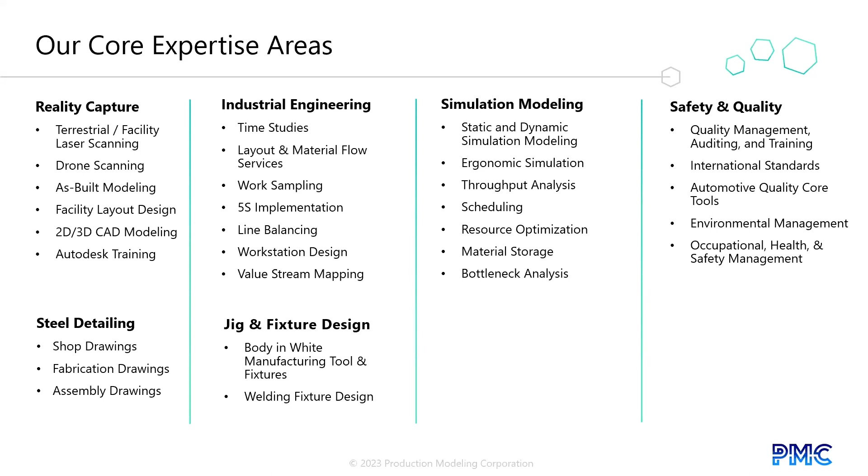Now I'd like to introduce Dave Stone to begin our presentation, Reality Capture and Simulation. Dave, take it away. Good morning everyone, my name is Dave Stone. I'm the Director of Simulation Services at Production Modeling Corporation. I'm a veteran of the auto industry, over 30 years in automotive.

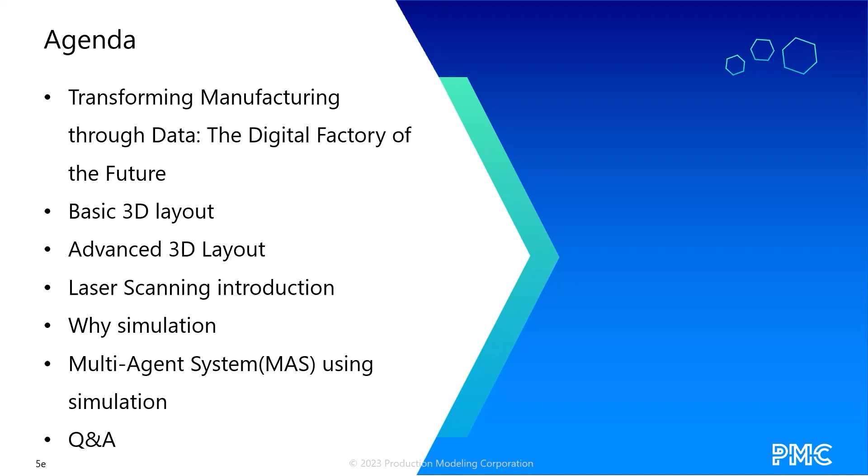Our agenda today will be transforming manufacturing through data, the digital factory of the future. We're going to cover the basic 3D layout, advanced 3D layout, laser scanning, why we simulate, and a multi-agent system using simulation, and then a question and answer at the end.

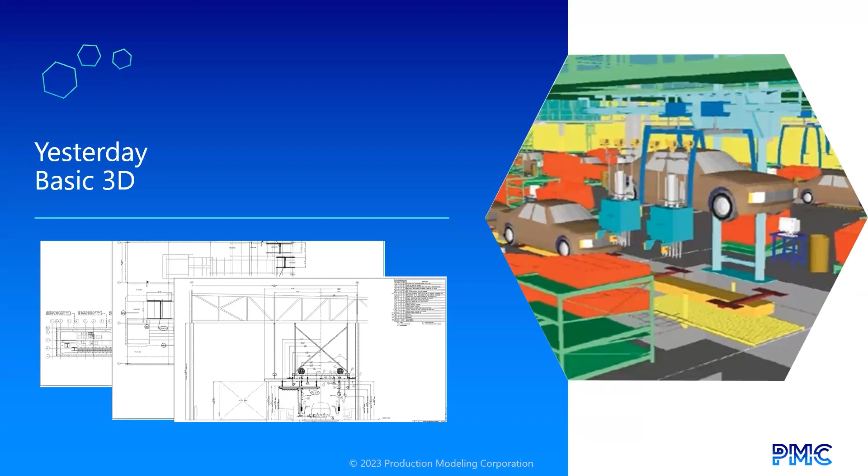So basic 3D, very crude graphics, very flat drawings. Planning for yesterday, data collection could take months. 2D to 3D conversion was complex. Laser scanning was not a large-scale option. Simulations were more advanced, but often 2D. You can see a 3D model running over on your right side.

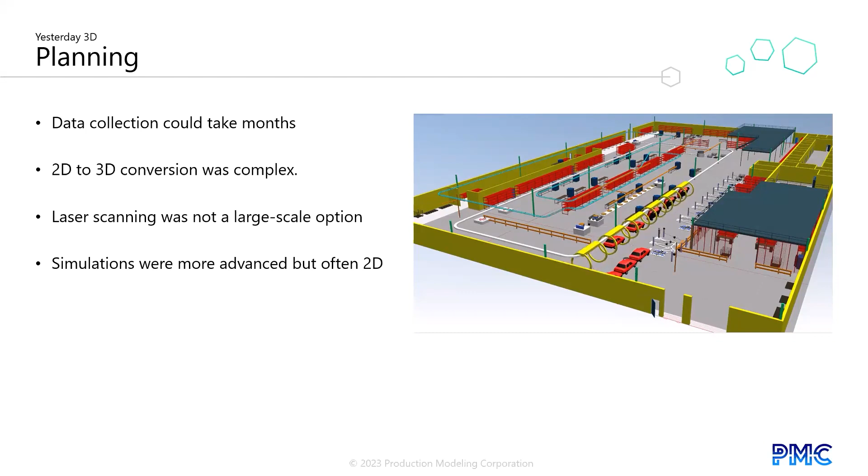Designing yesterday, primitive virtual validation begins. Hardware is still a struggle. Laser scanning takes root in manufacturing. Sharing of information improves, progressive companies begin asset libraries. Simulation advances and kinematic simulations begin to make major impacts in the industry, as you can see at the picture on the right, a laser scan.

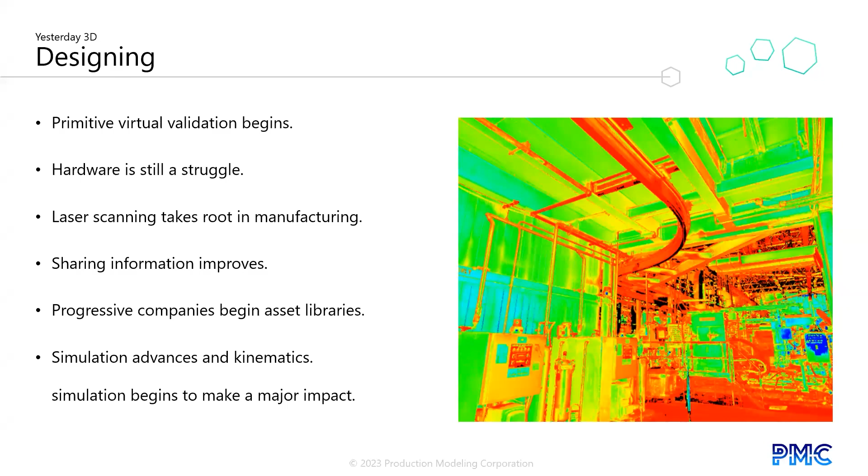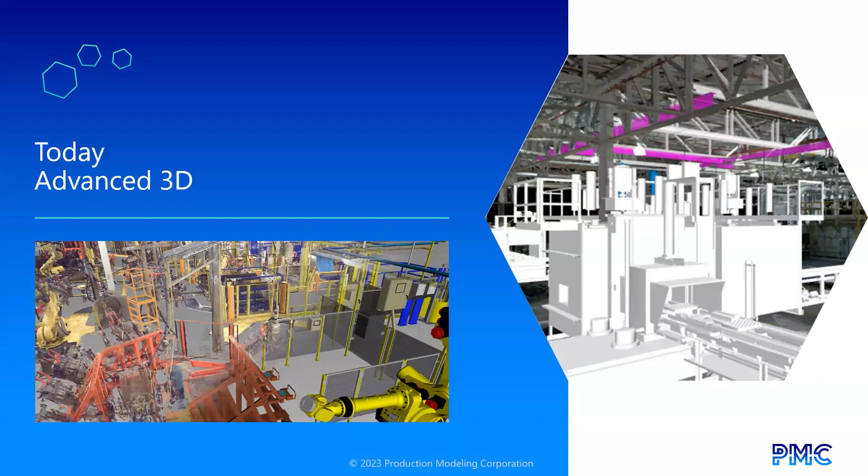Today, advanced 3D, as you can see in the pictures we have here, what is a photo and what is a scan, and what's the result of the simulation.

Today's planning, 3D leaders have well-established 3D workflows. 3D allows for advanced studies to be done in hours versus days or weeks. Asset libraries allow for more advanced early planning. Assets go beyond geometry and include data.

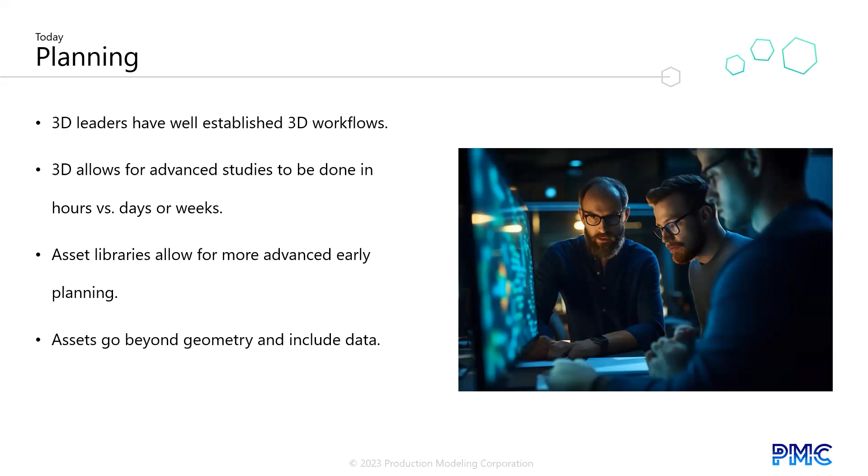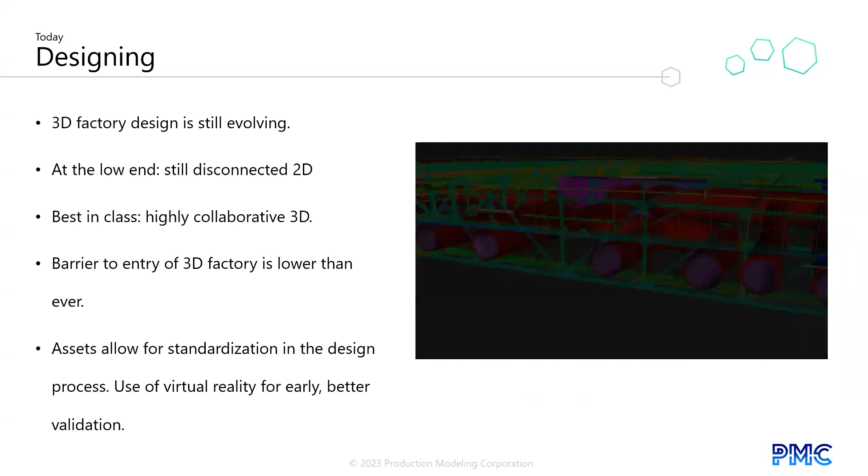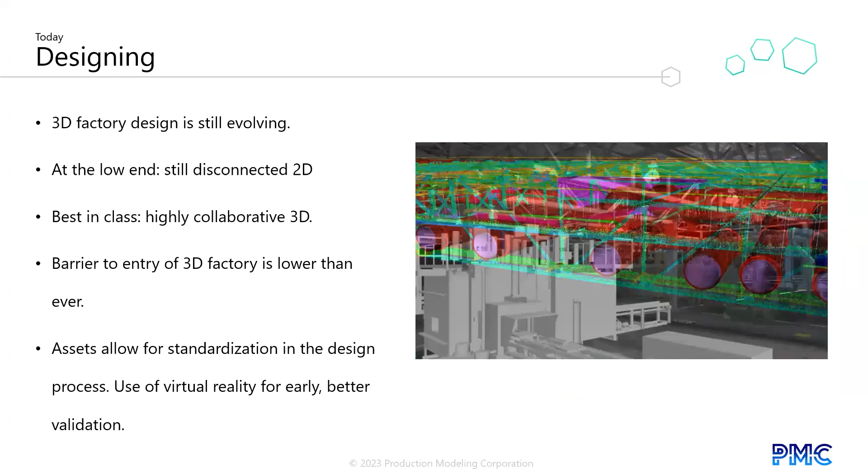Today's designing, 3D factory design is still evolving. At the low end, there's still 2D disconnect, but in best in class, highly collaborative 3D. Barrier to entry of the 3D factory is much lower than ever. Assets allow standardization in the design process and use of virtual reality for earlier, better validations. You can see the scrolling through on the right side.

Years ago, when PMC was working with an asset library for General Motors General Assembly, it drastically changed how the General Assemblies were designed and built. At first, we built the assets just to speed up our design development, which it did. Over the course of a few projects with General Motors, some of our program managers at GM started to notice that GAs were becoming more standardized, just because the layouts consistently showed the object.

They launched an initiative to fully standardize everything you could install for General Assembly. One basic example: standards for the control and monitor boxes for torque tools. There are 100 of these tools in a modern General Assembly, and historically they've just been installed wherever someone felt like putting them.

This causes a number of downstream issues, particularly for maintenance and install cost. We developed an adjustable stand that could hold 1 to 6 torque monitors and accommodated all the manufacturer equipment, to speed up the layout design work.

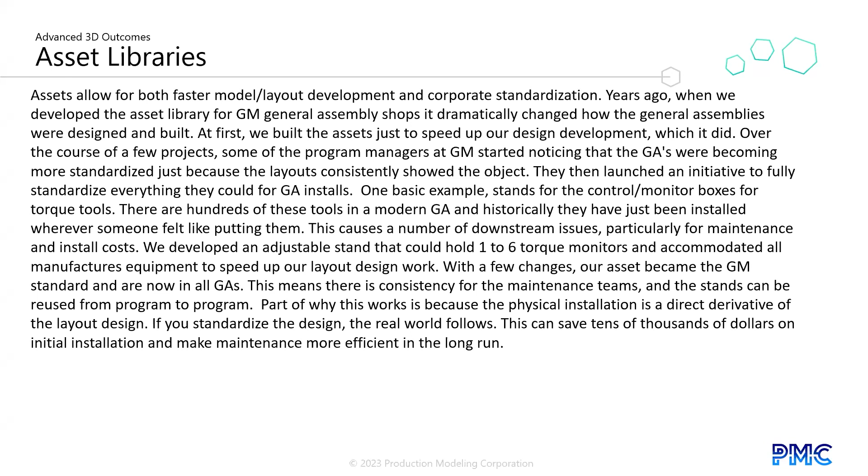With a few changes, our assets, which is this library that we have, became the GM standard and are now in all GAs. This means that consistently for the maintenance team, the stands can be reused from program to program. Part of why this works is because the physical installation is a direct derivative of our layout design. If you standardize the design and the real world follows, this can save tens of thousands of dollars on initial installation and maintenance and make you run more efficient.

So here we'll go back to the large objects. You can see these are CC90s, CC91, CC34s, dollies, dolly lifts, fork trucks. You can see the different taco stands that are down there, the tip tables that we have.

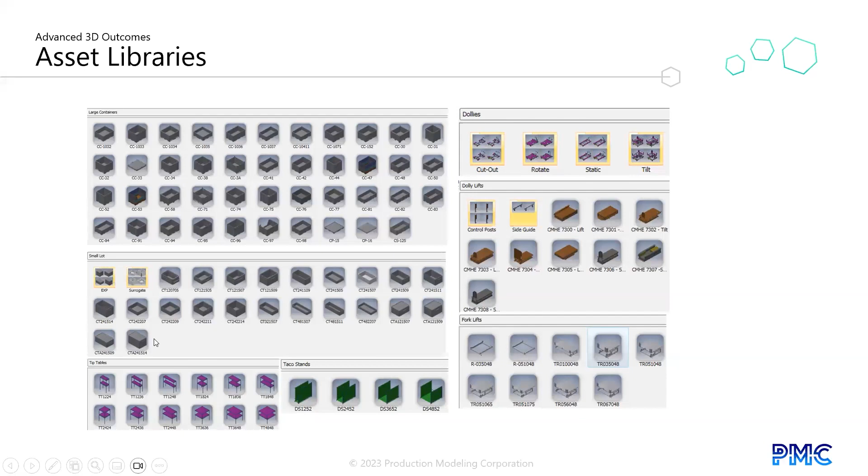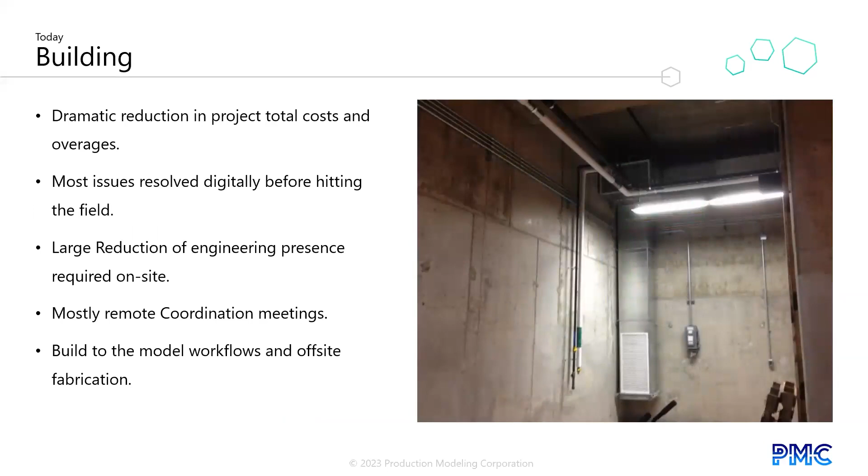So why do we do that? Well, today, building, we have a dramatic reduction in project total cost and overages. Most issues are resolved digitally before hitting the field. Large reduction in engineering presence that's required on site.

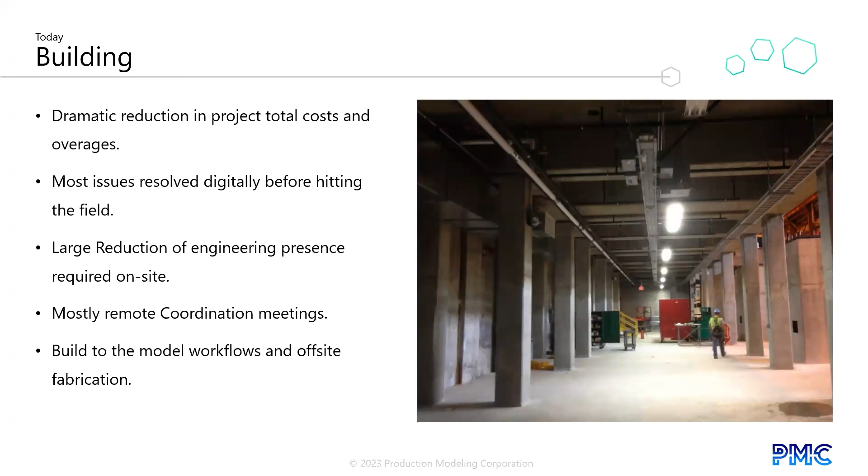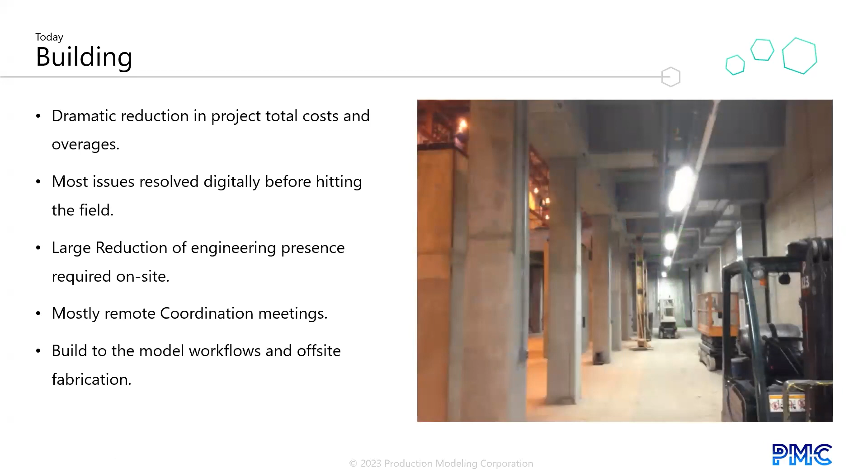This mostly results with remote coordination meetings, build to model workflows, and offsite fabrication. As you can see, as we're scrolling through, you're seeing some of the scans, and then you're seeing the live photograph of what is going on in that same area.

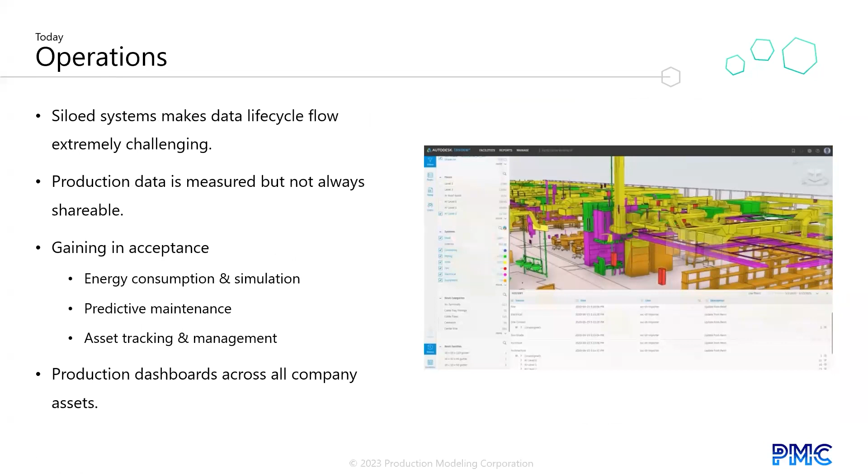Today, operations may be siloed, which makes data flow extremely challenging. Production data is measured but not always shareable. Gaining acceptance: energy consumption and simulation, predictive maintenance, asset tracking and management, production dashboards across all company assets. So you can see a virtual assembly that's here in this.

So what are we doing tomorrow? Data-rich factories. We're getting information from robots, delivery systems, and we're building dashboards. As you can see here on the pictures that we show you, some are virtual, some of them are photographs. How do we do it, you ask?

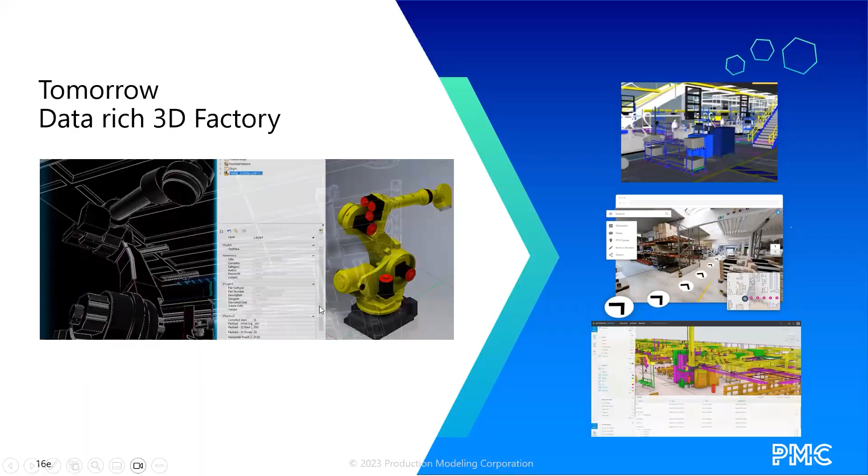Tomorrow's planning: single source data for multiple constituents, full life cycle implementations of operations data, feeding into planning data. Sustainability starting at the planning phase, not at the install phase. Emergence of cheaper, faster reality capture, increased automation and model development.

As you can see here in this photograph, this is actually a model that was built using one of the softwares.

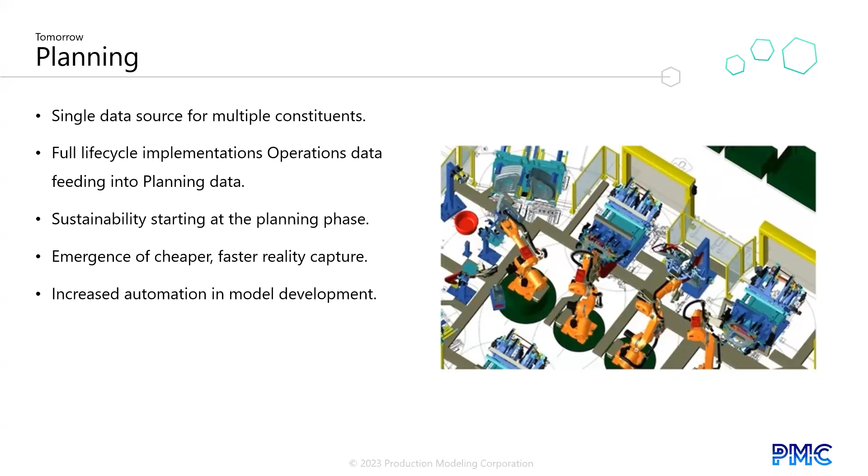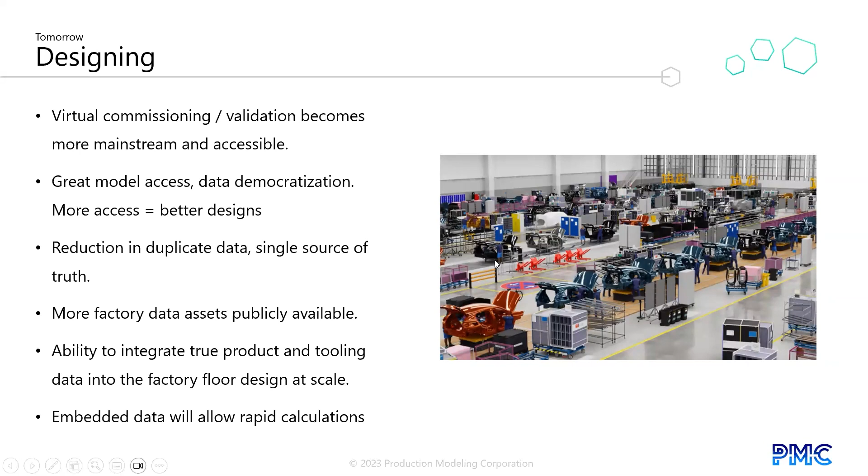Embedded data will allow rapid calculations. So you can see here the data, the floor of an assembly plant. Very lean, very clean. How did it get to that point?

Well, one of the things that we do at PMC is we offer a global reach for local service of laser scanning. We have engineering centers and scanning equipment that's both in the United States, Mexico, India. We cover Europe and China. We're the world's largest manufacturing scanning company.

On average, we scan over 10 million square meters of factory space per year. Most of that has been automotive, but we have been branching into other companies.

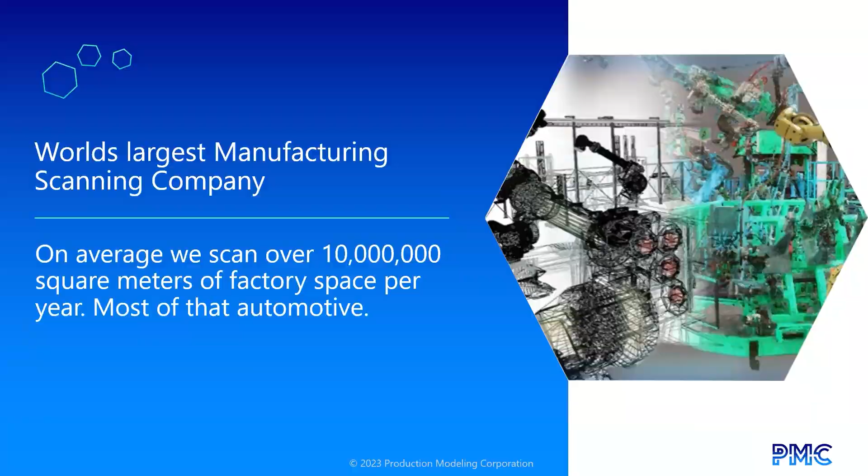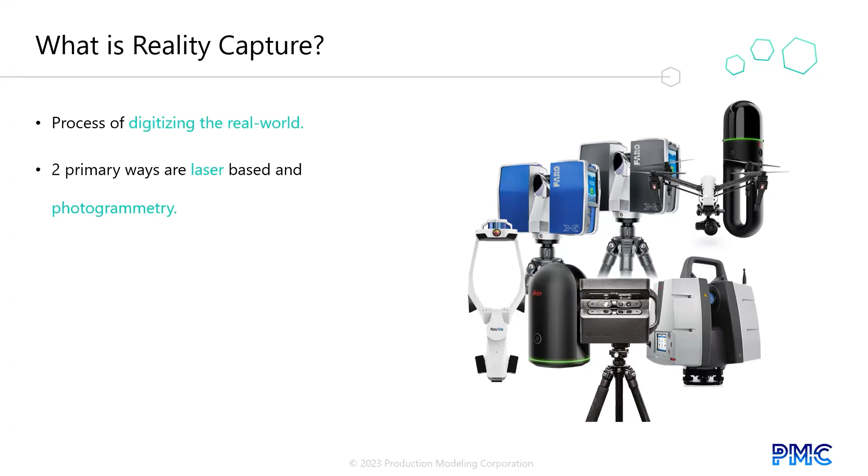What is reality capture? What's laser scanning? As you can see here, we have a FARO scanner on a tripod, traditional method. There are two ways. What is reality capture? The process of digitizing the real world. Two primary ways are based on laser and photogrammetry.

Color versus black and white. Color is captured with an integrated camera on the scanner. Capture of color data increases capture time by 150%. If you don't need it in color, don't use it. Color can provide visually stunning data. Color capture should be done when site is not active. As you can see the two photographs here, one is in color and one is in black and white.

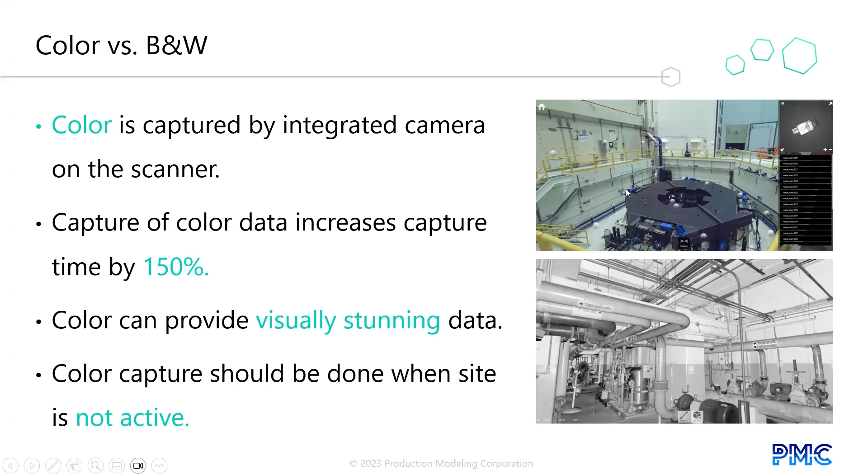There are 4 phases to reality capture. Details of each phase will vary based on the hardware and software used. There are dozens of possible outputs of the data. Outputs can be point data or model data. So we plan, we do on-site scanning, then we have to do registration, and then we have to do outputs. So you can see in the pictures here, scanning data, photogrammetry.

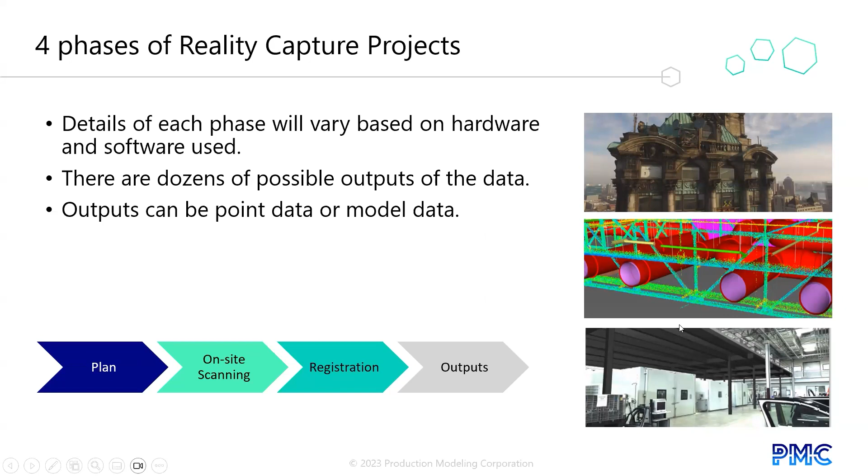Once we get on site, fixed scans take 5 to 15 minutes each. Expect every 4 to 5 scans to cover 1,000 square feet of the scope area. Best to scan when the site is inactive, but it's possible on active sites.

Depending on the size of projects, targets may be needed, and that's what we have in the box here. In some cases, permanent targets are required for multiple trip scanning. As you can see on the layout, the dots are where we're scanning some of our targets.

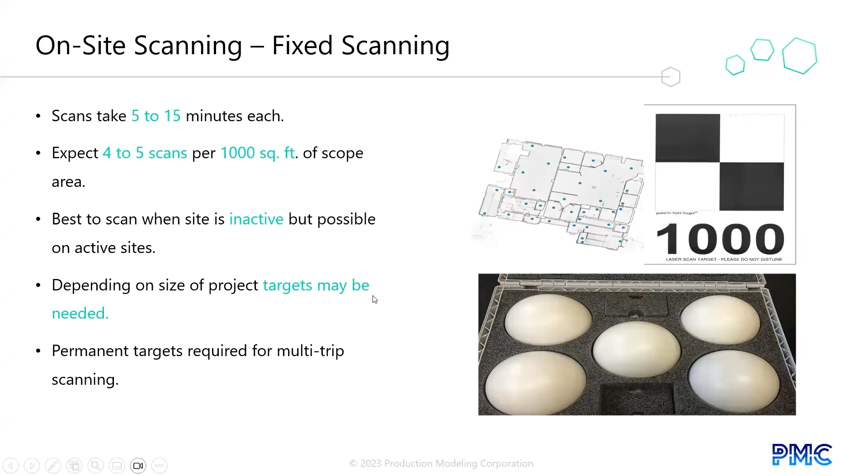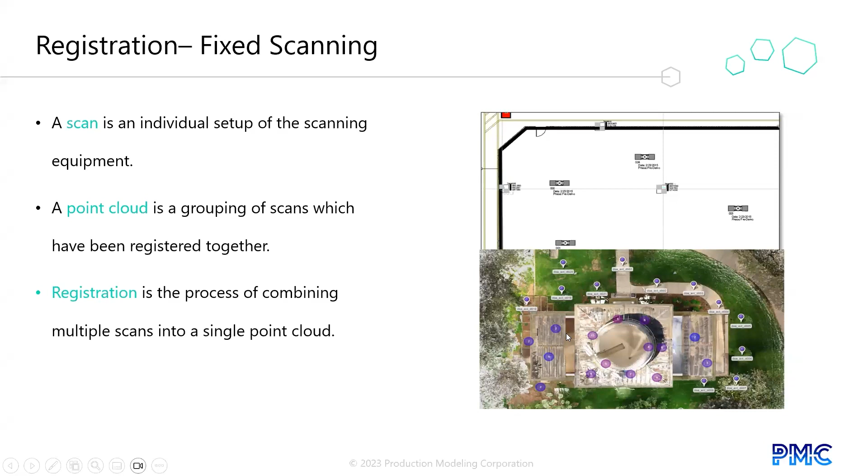Registration, fixed scanning, scans an individual setup of scanning equipment. Point cloud is a grouping of the scans together, which have been registered. Registration is the process of combining multiple scans into a single point cloud. As you can see, we've done multiple scans and we've created the point cloud.

On-site scanning can be done mobile or SLAM. Scan capture is continuous. Expect 10,000 square feet per capture per hour. Best to scan when the site is inactive, but it is possible when you're on active sites. Depending on the size of the project, survey points may be needed. Permanent targets are required for multiple trip scanning.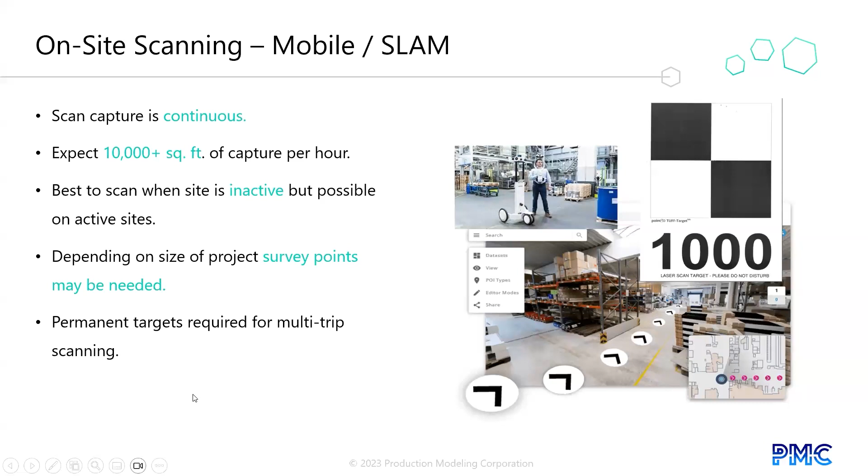Accuracy, you ask how accurate it is. Well, we follow the U.S. Institute of Building Documentation, which has 5 levels of accuracy. These levels define the accuracy spread of the data.

For example, every measured point in an LOA 20 data set should be no greater than plus or minus 50 millimeters off accurate, and should be expected to be no closer than 15 millimeters.

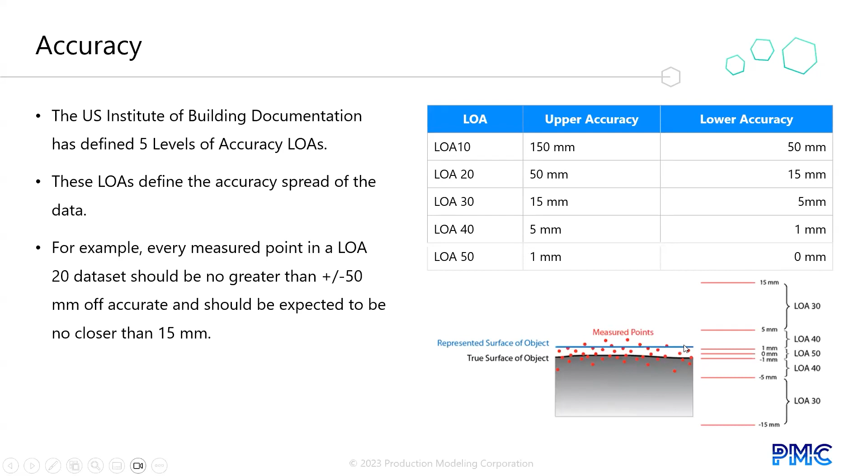Measured point clouds, you can see represented surface objects. You're seeing that in the graph here on the side, showing what can happen.

So how do we do it? What's the difference? The Faro scanners are plus or minus 0.2 inches, medium speed capture, with a practical range of 50 feet. Most general purpose scanning projects can use this.

Next, we have the NavVis and NavVis Mobile. It's plus or minus 0.5 inches, and it's very fast, with 50 feet as a practical range. When accuracy can be traded off for speed, this allows the site tech to work when the site allows for it. So if you don't have fast time or the time available, we can use that system.

The next is a handheld Faro, plus or minus 2 inches. It's ultra fast, but only scans 20 feet. Used when speed is most important.

Then we have the drones, which do plus or minus 1 to 2 inches. They're fast, long range site capture. The next one is ultra fast capture speed, 5-foot practical range, for simple sites and high volume. Accuracy is unknown at this point.

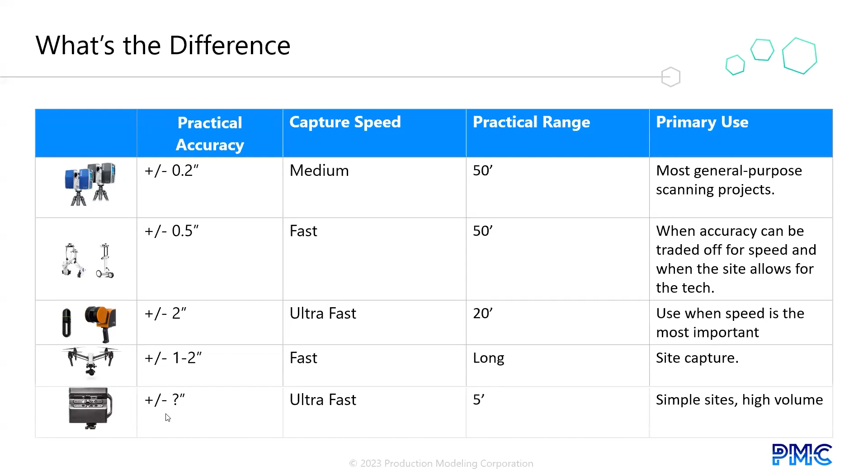Here's a 3D simulation. So when we built this model, it might be your factory, it might be your competitor's factory. This is done in Tecnomatix Plant Simulation. You can see the cranes are moving, unloading and loading on the left-hand side with a fork truck bringing material. You have several robots that are unloading onto conveyor systems.

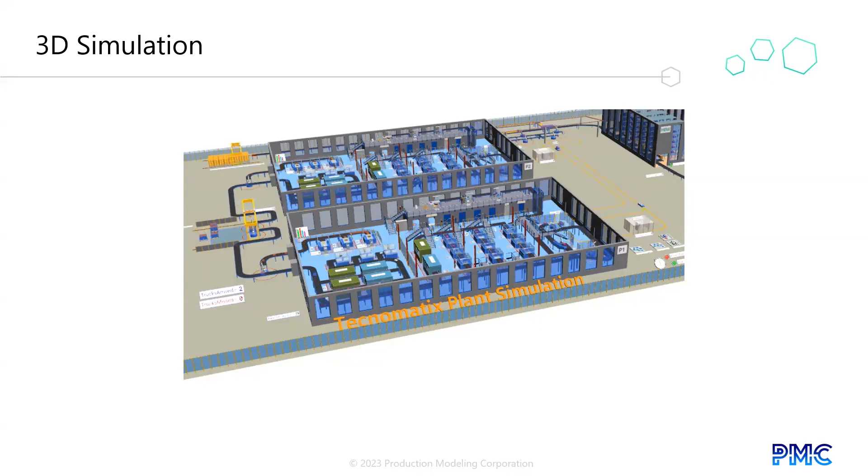Inside the area, you have people that are walking around. On the right side of the model, you can see more AGVs taking things in and out of the plant, moving them to different areas. So this is what 3D simulation will give you.

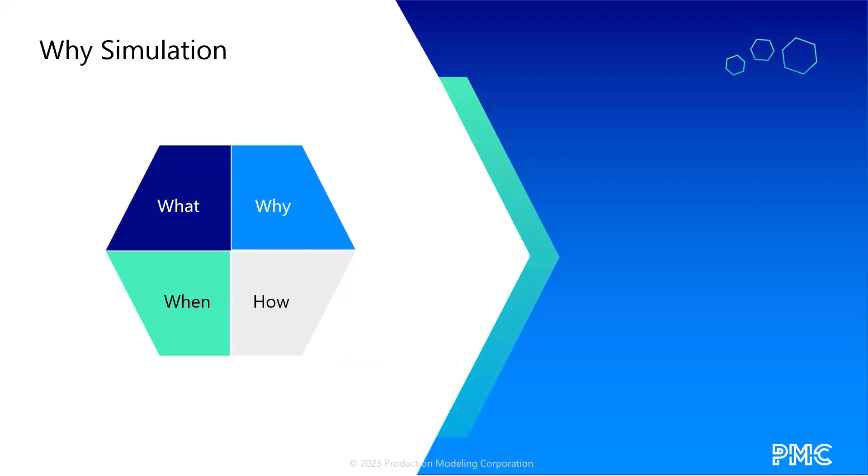Now, why do we simulate? What is it? Well, simulation is the art and science of creating a representation of your process system for the purpose of experimentation and evaluation.

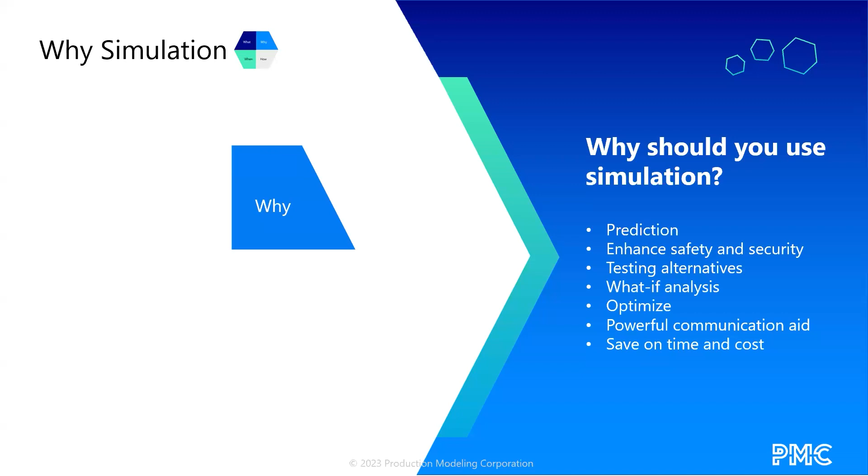Why you should use simulation: prediction, enhanced safety and security, testing alternatives, what-if analysis to optimize your process. It's a powerful communication tool, and it saves time and cost in your designs.

When you should simulate: when analytical approaches are not suitable, when the process is too dynamic or highly complex, when real life experiments aren't an option because the system is fixed and locked or does not yet exist, and when there's high risk, cost, and time needed.

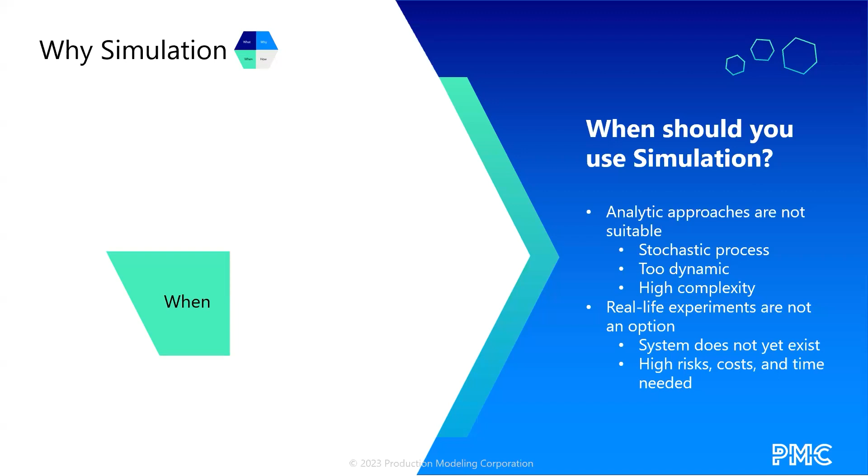How to do simulations of pedestrians. We'll look at pedestrian dynamics software, Plant Sim software, and AnyLogic software. Each pedestrian is represented individually, with interaction between pedestrians, traffic, and infrastructure and services.

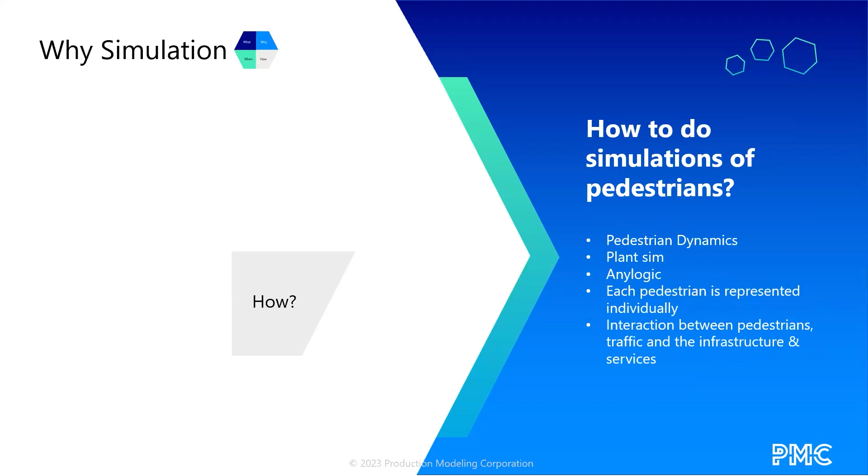Now we'll look at the tool, pedestrian dynamics. It's a crowd simulation tool. Crowds are microscopic simulations with individual pedestrian characteristics, capable of simulating large crowds up to millions of people, in a multi-layer environment with rapid modeling and building of complex infrastructures through the import of your CAD data and BIM data.

Multiple sequential processes: design, operation, and repurposing. Multiple outputs for analysis: density, throughput, wait times. There's a 2D and 3D visualization of interaction between pedestrians and infrastructure.

Validated, verified, developed in close cooperation with academia, and validated and verified according to international guidelines. They continue to invest in the research and development of the tool.

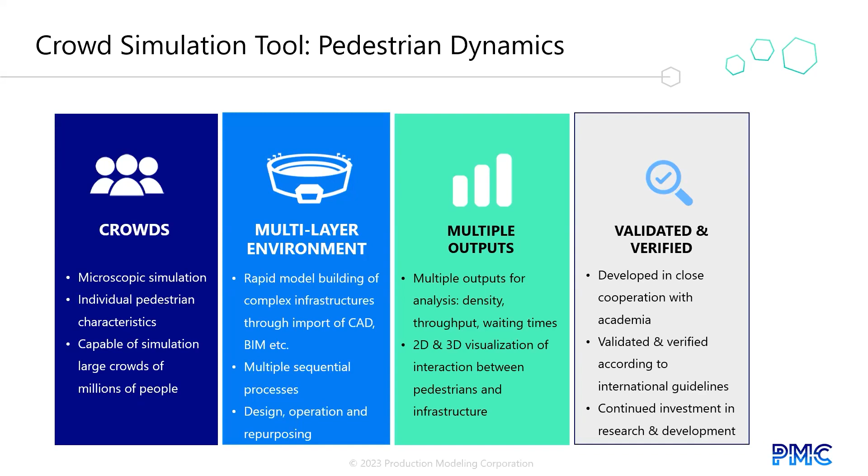So what do we get out from pedestrian dynamics as an example? Here's a 3D view, density maps, travel times, evacuation times, flow counter. The red areas in the density maps indicate high flow, and you can see the density and level of service over time.

You can see the graph right here on the right showing peaks as you're going, and then when you get all your people out, you're done.

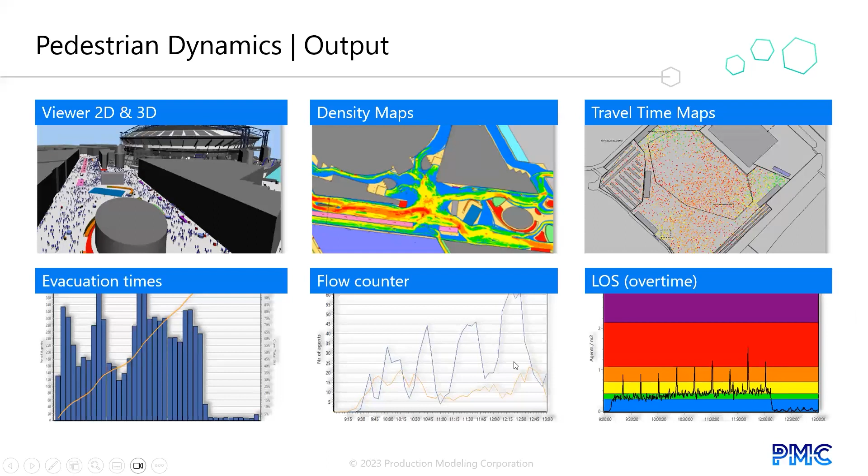So here's an office evacuation. People are going about their office, milling around, coming and going, doing things. They're coming into work in the morning, going to different cubicles, going to meetings, coming about, and an event happens. Now we have to evacuate.

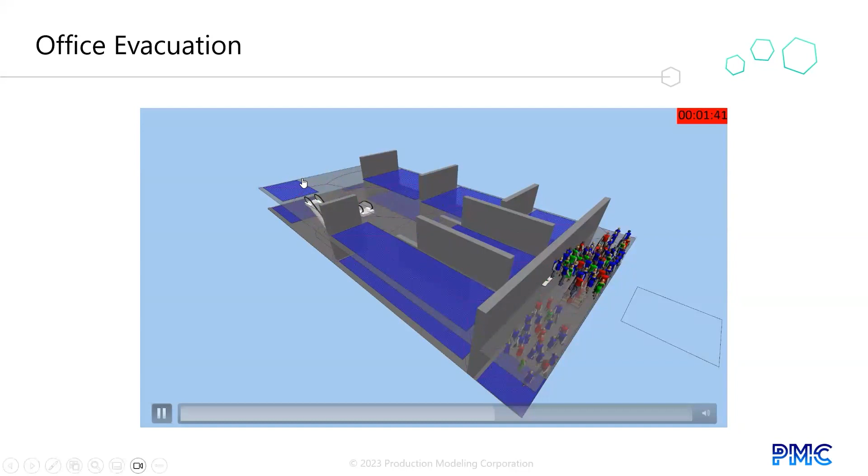As you can see, we're getting a bottleneck over here at the stairs. More people went there than it can handle, so it's taking time. The timer at the top right-hand corner is still counting down the pedestrians. The left side of the office, where they went down the escalator, is empty. We're over 2 minutes to clear out the office now.

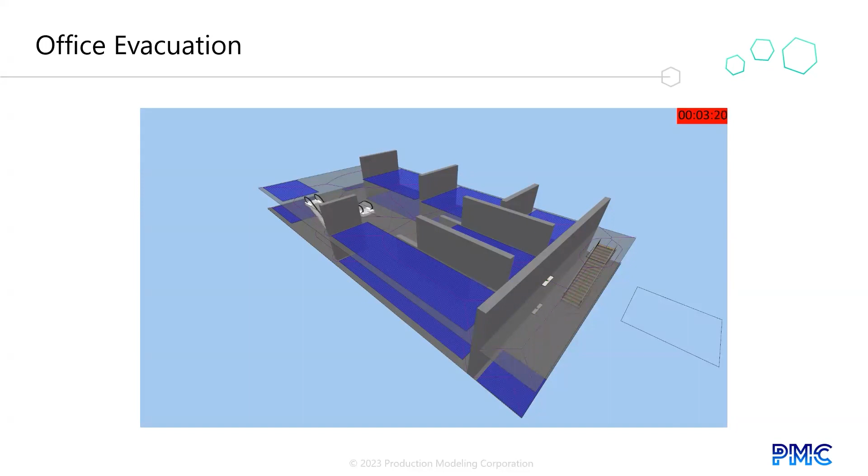And you ask, why does this matter? Well, if you're trying to eliminate a hazard and get people out in time, you need to know how long it takes to clear out your office areas: 3 minutes and 20 seconds.